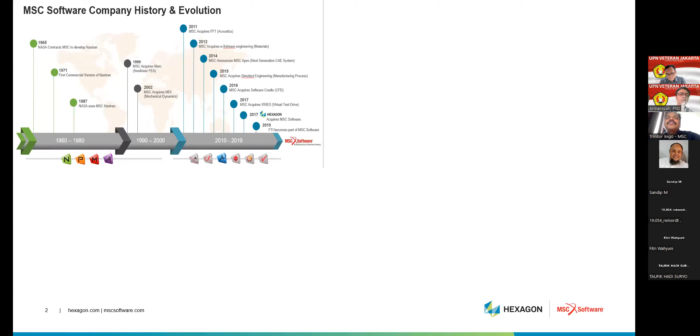So that's some brief history about MSC, how we started off. This is the same thing in terms of milestones that we have mentioned. The one which is talking today is basically Simufact. We acquired this company in 2015. Of course, Sandeep will give more overview of Simufact, especially on the welding side.

But these are all the kind of technology we got. Now, starting from Nastran - Nastran is a general purpose finite element structural software, where you can apply loads, boundary conditions, and see the stresses and deformation. And then Marc is a nonlinear solver, a highly nonlinear solver. And then Dytran is basically explicit dynamics, for your drop analysis, crash simulation, and those applications.

And Simufact is basically for metal forming, forging, welding, upsetting, or traditional manufacturing process simulation. Digimat is a tool used for multi-scale material modeling, like plastics, reinforced plastics, engineering plastics, mold flow, the fiber orientations in the plastics component. So that studies mainly the plastics and material side, polymer side, composites.

Then Actran is for acoustic and noise. For example, today noise has also become one of the important criteria. So any product you manufacture needs to get certified by authorities or government. Noise has become a pollution today, so every product has a certain level of noise they need to maintain in terms of decibels. For example, automotive engine noise, aircraft noise, or any kind of noise - we are able to simulate it virtually and modify or improve the noise aspect of the product. That's Actran.

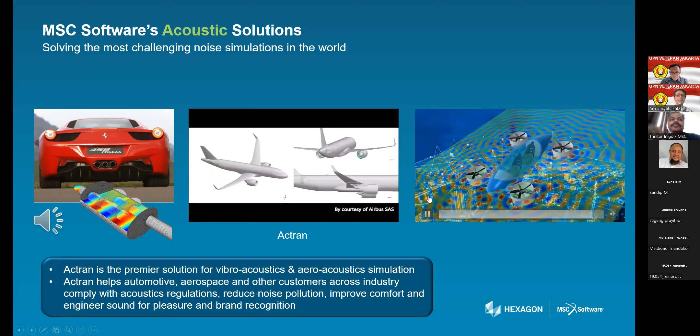This is again from MSC Adams plus VTD combined tool. And then you can see the gearbox, where you have the powertrain mechanism and gearbox and those things. So this also we have a solution for—Romax.

That's all, this is a little bit. So the virtual manufacturing, which I talked about—stamping basically, tool development, the blank and the fixtures. How to maximize material utilization, how to reduce scrap materials. The scrap or flash material can save companies a lot of time in terms of revenue. And cost optimizer—how best you can, on the tool designing side, help manufacturing companies build a tool in an optimal way.

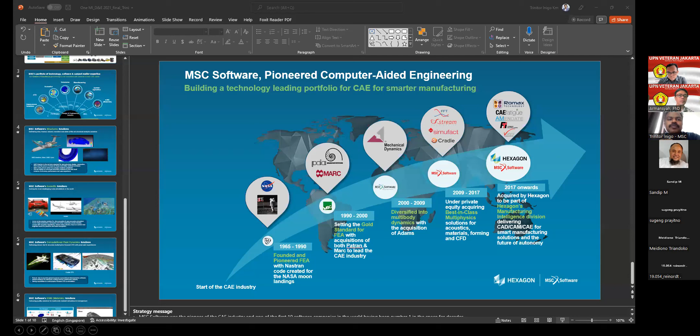Okay, so do you have any questions so far? Excuse me, any questions so far? So far, yeah, very interesting information.

So far, I can see MSC software, such as Adams and Cradle and so on, which can also be used for simulation and many things in engineering applications, such as robotics, automotive engineering, manufacturing, and so on.

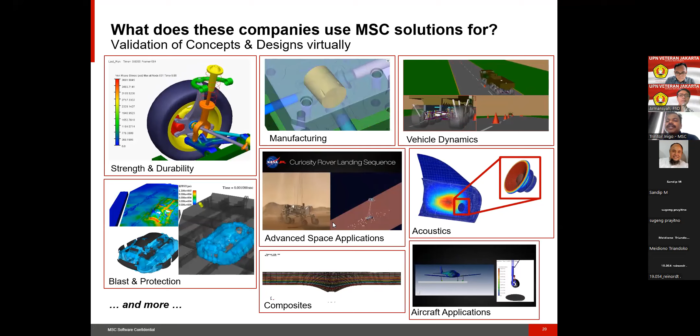So these are all the areas of application, MSC is there. And again, building the bridge between academic and manufacturing is another area. You can see there is a gap in applying math, science, and engineering - that is where the 98% gap is. That is why we collaborate more with industry-oriented R&D focus with colleges, universities, and academics, so that they get real-life applications with real-life tools, and people are able to get a job, driving the country's economy through this engagement.

Now I'll just keep this slide and go straight to these are a couple of universities. They adapted this in their syllabus and curriculum. And another one is some student competitions, like SAE, Baja, and those kinds of competitions, we offer licenses.

Now there is a course material we recently developed. This is one of the sample course contents. For example, you would have known this textbook, Design of Machinery, written by Norton. Many universities prefer this one during their third or fourth semester. So our couple of university professors in the US took this textbook and created some material, like tutorials, workshops, and exercises.

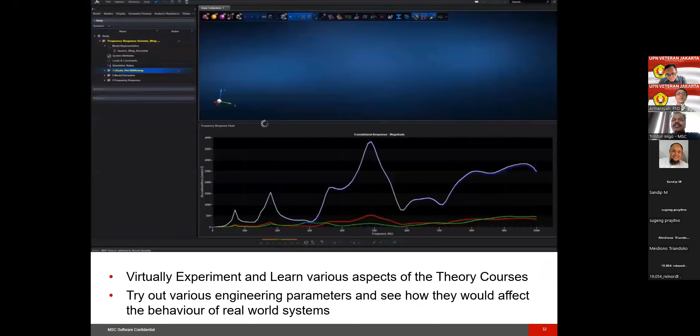In the morning they teach topics like cam and follower, and we created a supplementary toolkit. So in the afternoon in the laboratory, they go to the computer CAE lab and simulate. Morning they follow this cam and follower, or 4-bar mechanism, linkage mechanism. This can be applied in mechanical design, dynamics, robotics, and many machinery courses, like gear train, pulley problems. All these problems are referred to in the textbook, and we created a sample and compared the result - these are a couple, this is a 4-bar link mechanism.

So all these areas, when the professors or lecturers teach in semester 3 or 4 in mechanical engineering, we use SimuFact or respective softwares from MSC. They use it in the laboratories. These are a couple of examples like molding, glass molding, casting simulation, piezoelectric actuators, MEMS, and then fluid mechanics, for example buoyancy or fluid.

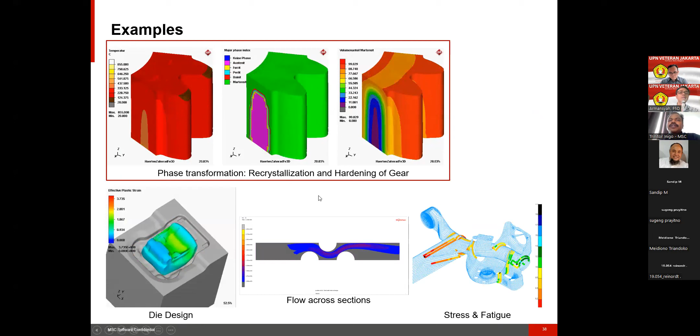This is another semester's things - we use Marc, SimuFact, and this. So this is a die design, one of the die design simulations we do. These are a couple of examples I can show. So like this, we can go on, for the fourth semester.

I'll just show this impact study, then this is wind energy - of course you may have this in a couple of your semesters. The cam follower mechanism, so how we are teaching in theory in the classroom. How we can do riveting, rolling, chain, assembly line. This is again robotics, a picking and placing robot, that trajectory. This is not only a mechanism, it has a mechatronic system because it uses pneumatics or motors to trigger the motion and things like that.

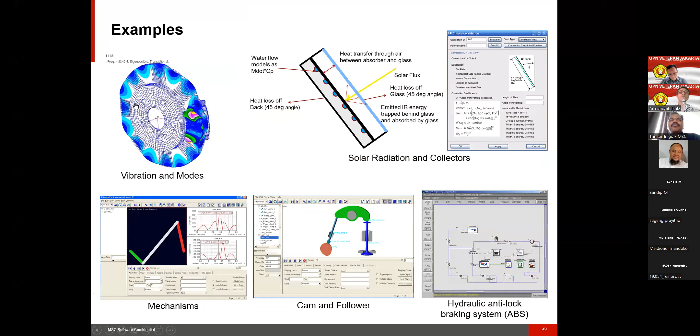So like this, we have every semester - this is 7th semester, and robotics, basically climbing robotics on a stair, shock waves, bending. These are all a couple of examples our students use in the engineering divisions. So that's all, this is one way how we can do it. This is 3D printing, the last one.

So now, this is one slide I wanted to focus on. There is a specific industry like automotive, aerospace in the market or country, and there are universities or academics. Industry will recruit students from universities, but at the same time industries will give a project or research to universities. So there is a two-way mutual interaction that should happen, and it is happening.

And where we belong is our MSC products at the bottom, where we supply to university, we collaborate with the industries, so that when these students exchange happens between university and industry, it will be a common platform or common technology or skills development. So that is where the academy supplies enough manpower to the country.

So with this, I will conclude my presentation. If you have any questions on this topic, please feel free to raise a question. I will hand over my session to Sandeep, and he will take you more detailed on welding and maybe a demo if he has enough time. He will show you a simple problem, how to set up or how to show the results. And then feel free to ask about any capabilities or features or anything you are particularly looking for. Let's discuss that.

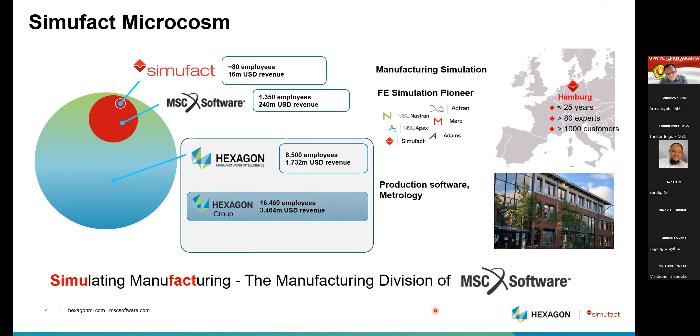And this is the history of the Simufact welding software. So all these companies, BMW, Mercedes, Porsche, Volkswagen, Audi, all these companies came together and gave an order to Simufact to develop a software for their particular welding application. Simufact developed that software and tested it in their shop floors. Since they invested in our software, it was exclusively used for them from year 2005 to year 2012. After year 2012, it was available for everybody.

And year on year, we have added a lot of capabilities like resistance spot welding. We have improved our solver and meshing capabilities. In the last version, we added this direct energy deposition method, which is a kind of additive manufacturing process, and this is a very hot topic area right now in academics as well. It includes processes like WAAM and layer by layer addition. The latest variation is Simufact welding 2021, which has a Python interface along with a lot of capabilities.

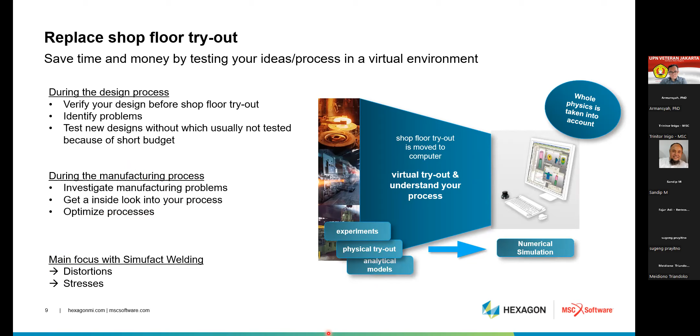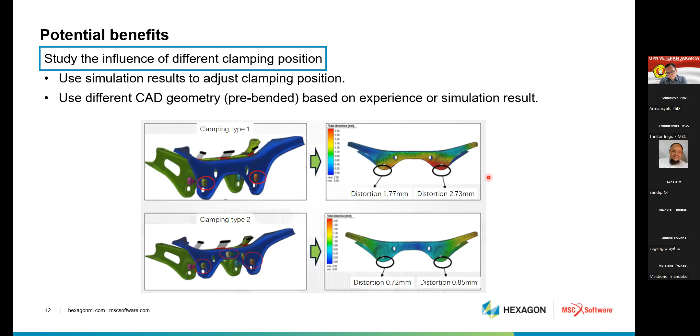It also helps you in designing the process, basically the design of experiment study, which academics needs. There are a lot of parameters that influence product quality or weld quality, like welding direction, welding sequence, pre-bowing or pre-bending, the number of welders or robots, and heat input, basically current and voltage.

So we can do this kind of design of experimental study. So as of now, we have seen the potential benefits we can get. Now we'll see some case studies.

Next example is inner door assembly welding, which includes laser welding. This is an Audi car door example. There are 3 robots working at the same time, and for each robot the welding sequence is shown with these lines.

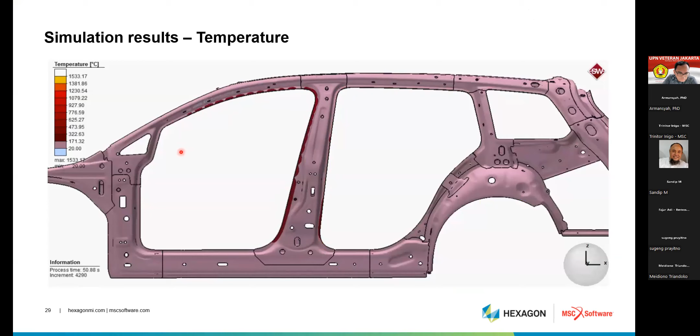Another example is the B pillar welding. In the animation you can see the welding operation happening and this is the temperature result, showing how the temperature is generated during welding. And this is the distortion, showing the area of high distortion, which is about 2 mm here, and this is the back side of it.

Another case study is from the Vollmann group, where we have included the forming history also, using the Simufact forming software. This is the final component. To form this component, there are 11 forming stages, like coining, cutting, stamping, and bending operation.

We take the results from one stage to the second, second to third, third to fourth, and so on, carrying the history through, and this is the final output. You can see it in this animation: this is the bending operation, this is my component, and this is my pressing tool.

Once it pushes and gets released, you can see there is a small spring back. We can accurately predict the spring back with the software. Then from the forming, we take the results to the welding operation, and you can see in this animation that the welding operation is happening. We have two cases.

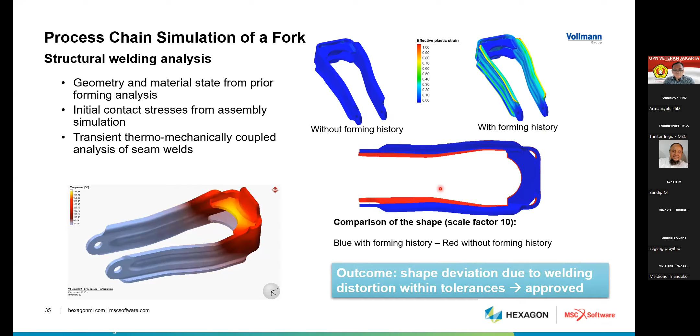Next example is resistance spot welding. This is the Jetta car example where we are doing the spot welding operation on the B pillar of the car. These are the fixtures, and you can see the temperature result during that, along with the distortion result and the stresses.

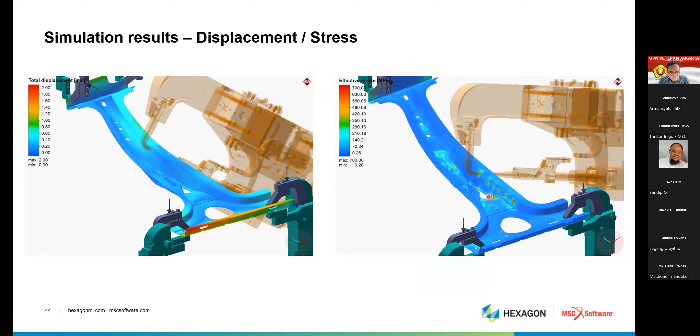You can see that high stresses are being generated over here. If the stresses are beyond the limit, the component will show either a crack or damage type of defect.

Next example is process optimization and fixture weight reduction. This is a two-wheeler bike assembly, and the components include the support and the wheel house, and this is the welding area. This is a typical shop floor setup: on one station the robot does the operation or manual welding, and on another the operator is loading the components.

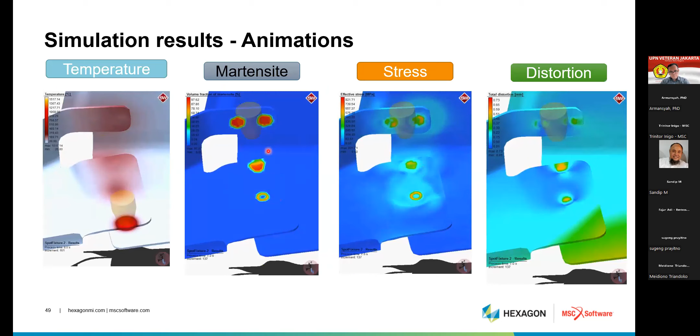This is how it looks on the fixture. The green and red parts are the components, and the rest are the clamps, with a total of 7 clamp towers, and the total weight is around 279 kgs. Then we see the different results: temperature, phase transformation (martensite formation) at the spots, stresses, and distortion.

After seeing that, we reduced 2 clamp towers from the fixture setting and adjusted the position of the clamps. The total weight was around 279 kgs, and after removing those clamp towers it came down to around 211 kgs.

Before removing those clamp towers, high distortion was happening in this zone, and after removing them we can see less distortion. So the fixture weight got reduced by 25% and the distortion by 70%.

So the next thing I wanted to showcase is this.

I wanted to showcase a case study on welding sequence optimization using artificial intelligence or machine learning. We have a tool called WSO, mainly for arc welding applications.

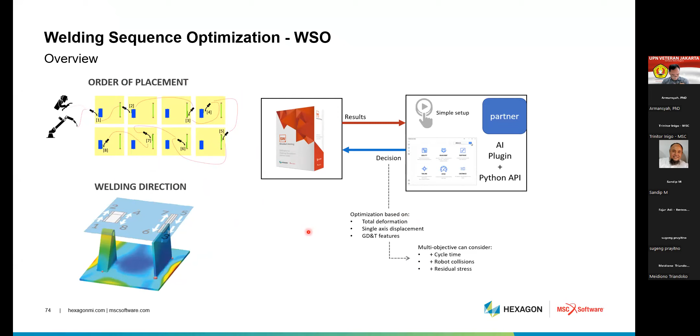If you have any welding sequence and want to optimize it, you don't know which welding sequence should be used to have minimum distortion or stresses. With the help of artificial intelligence or machine learning, we can predict what the welding sequence should be. This is the case study.

This is the cab floor, with some 117 weld bits and 12 components.

This is the WSO modeling. This was the original weld sequence, and you can see the welding happening over here.

With around 117 welds, our software predicted the optimized weld sequence, and it only takes 10 to 15 minutes. So within 10-15 minutes you get to know what the welding sequence should be to have minimum distortion or stresses.

With the original sequence, you can see the high distortion was there, beyond 7 mm. With the welding sequence optimizer, we are getting the distortion below 4 mm.

Again, this is from the bottom side. After unclamping, you can see that there is less distortion over here.

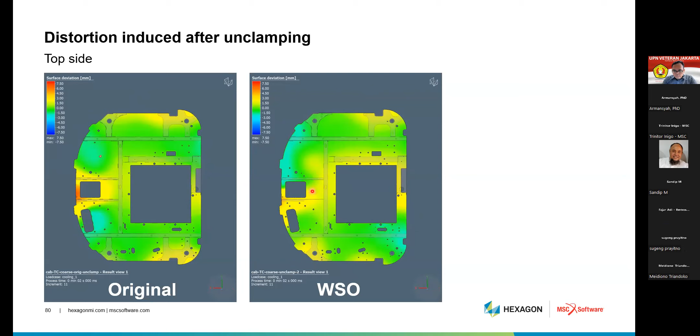Another case study is on the mounting bracket. This was very important because the components should be within tolerance to get the fitment. Earlier, with the original weld sequence, a lot of areas were out of the tolerance values.

When we predicted the weld sequence and did the welding, we can see that everything is in the green zone, meaning it is within the tolerance levels.

Okay, so up to now what you have seen is case studies for the manufacturing side. Now the case studies are for example if you want to take these manufacturing effects into your normal CAE process, or you want to do the structural analysis or the fatigue analysis. Fatigue analysis is nothing but you want to calculate the life of that component or the welds.

Okay, so the first example is the crash box. This is a typical location of the crash box, and these are the different shapes of the crash box. And after impact, this is how it looks like.

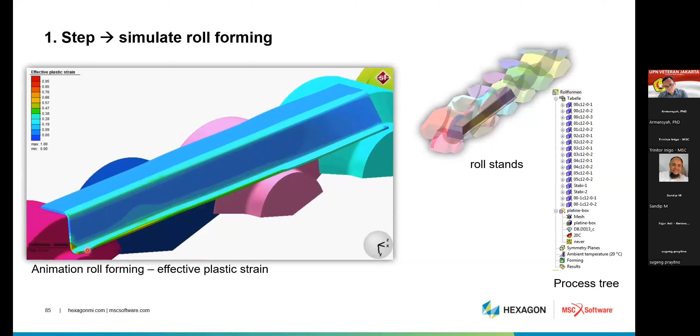So the first operation is the rolling operation. The flat sheet is passed through the rollers, and it creates a kind of U shape of the tube. Then we transfer it to the welding operation, and you can see this welding happening. So this is my base plate, these are the fixtures, and as an output we get the stresses and the distortion.

And this is the crash test we did. In one case we have considered all the forming and welding history, and in one case we have not considered any history. You can clearly see that the location of the distortion is totally different. And the graph showcases the absorbed energy by the crash box during that crash test - you can see there is a clear difference.

Now we'll see the case study for the fatigue analysis. This is an ongoing effort by the SAE FD&E committee to understand the weld-induced residual stresses and their effect on the fatigue life of the component. It will showcase after how many cycles this component will fail, or the damage or crack will happen under the operating conditions.

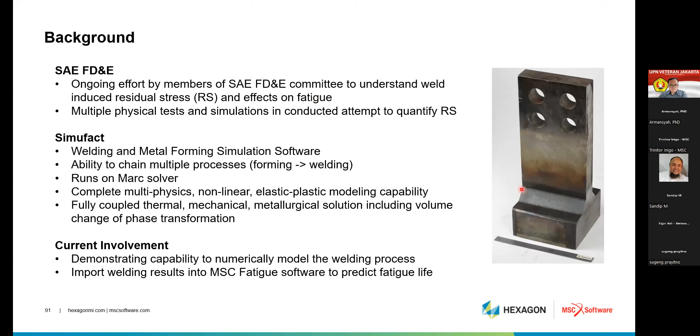So this is a standard making committee. There are 3 stages in this particular process. First is the welding simulation, second is the structural analysis, and the third is the fatigue life simulation. So we transfer the results from one stage to the second to the third. Now we'll see each process in detail one by one.

So this is the macro graph, it showcases that there are a total of six welds - 3 on each side, and the numbering shows the weld sequence: first weld here, second weld here, third, fourth, fifth, and sixth. Okay, and with this we are getting this kind of macrograph.

So for these 6 welds, we have these inputs like the voltage, current, wire speed, torch velocity, torch angle, and the cooling time between the 2 welds. With this setting we are getting this kind of weld pool, and when we compare it with the macrograph, it has come up perfectly.

And this is the test result, and we can see that the red area means the highest zone is there - the highest stress area is near the weld, and the component might fail at this particular zone. And this is the distortion, so it is bending towards the left hand side. These black arrows and lines you are seeing show the initial position of the component, and this colored one is the final output position. And this is a clip section showing that there are very high stresses here.

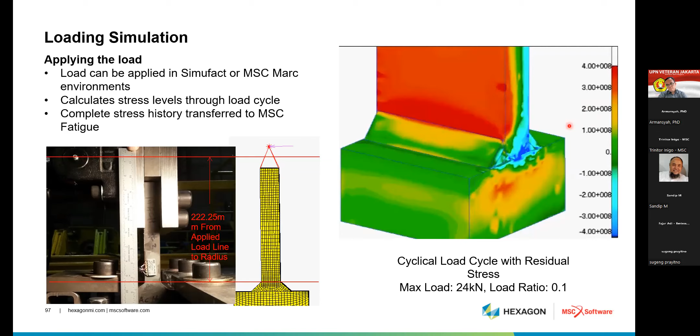And then we transfer the results to the fatigue software - we have MSC Fatigue or CAE Fatigue, in which we see that with a load of 24 kilonewton and R value of 0.1, we have calculated the simulated life as 47,700 cycles. So after these many cycles the component will fail, or the crack or damage will happen in this particular area.

This is the comparison with the shop floor setup. For 24 kilonewton and R value 0.1, we have the mean of the test data and max of the test data, and when we take the average of these two, it comes around 50,000, while the simulated life comes around 47,700 cycles. So it predicted very accurately in the software. This is my last slide - SIMUFACT has 3 softwares.

First one is the SIMUFACT Forming, in which we cover all the forming processes, right from cold forming, hot forging, sheet metal forming, mechanical joining, pressure welding, rolling, ring rolling, open forging, and heat treatment. These are the main modules, and under those main modules there are different sub-processes, like upsetting, bending, heating—all those sub-processes fall under those modules.

Also, we have a second software for additive manufacturing simulations, which covers powder bed fusion and metal binder jetting. We have just released this week the newest version of additive, where we can do the machining operation as well.

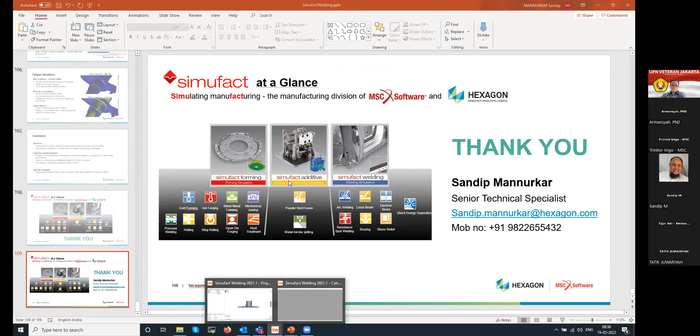Yeah, so maybe show how it simply works. Yes, yes, please. Okay, thank you.

So this is my screen—when I open the Simufact Welding software, it comes up like this. I'm going to show you what input parameters are required, and how easy it is to do the welding process. So I will create a new project.

Then it asks what type of process it is, whether arc welding, laser welding, brazing, or spot welding. You can choose accordingly based on your process. For demo purposes, I'm taking the arc welding operation. Here we can set up the ambient temperature—that's fine. Also we can define the gravity.

There are some parameters, like the components to be welded. The bearing is a part of the fixture—it's kind of a base plate. Then there are fixed geometries, fixed nodes, and other boundary conditions. Clamping, as the name suggests, is a clamp. Local joint is for tack welds. And robotic—whether it's robot welding or manual welding—we can specify those. So I will specify: one bearing, two clamps, and one robot, and say okay.

As soon as I say okay, it opens three GUIs. First is the process window, where we define our process. Second is the object catalog window, where we input the parameters required for the process. And third is the GUI. For any welding simulation, we need only five parameters. First one is the geometries—you can import the CAD geometries, or you can import the mesh.

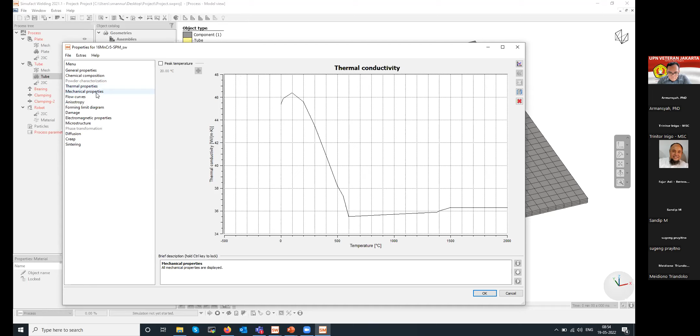Similarly, mechanical properties like Young's modulus and thermal expansion coefficients change with respect to temperature. This graph shows thermal conductivity versus temperature. We also have the flow curves, which are stress versus strain graphs, shown with respect to different temperatures. These properties are very important and all are temperature dependent, so we get very accurate results.

The third parameter is the temperature - basically the initial temperature of the components, which we need to define. We can also define the heat transfer coefficients.

The 4th parameter is the trajectory, where we define our weld line. I need to select the starting point of the weld and the end point of the weld, and it connects all the dots in between. So this is my starting point and this is my end point - it automatically selects the nodes in between.

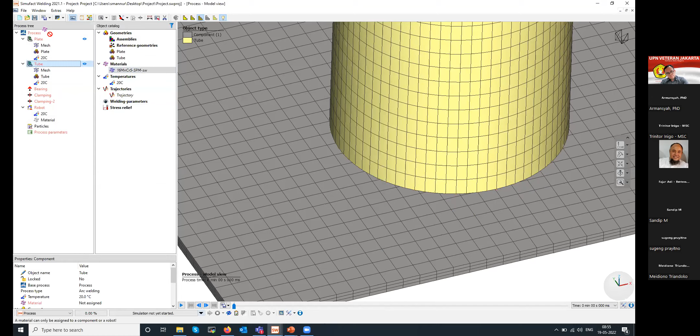I will assign this material to everyone by dragging it to the process, and it automatically assigns it. You can define different materials for each component. Then I can define the trajectories to the robot - later on we'll see what those arrows mean.

Coming to the last part of the object catalog window, the heat source - I right click and select heat source. Here we define the welding parameters, starting with the torch velocity. I can select the unit as per my requirement, and I give it some random values for the torch velocity.

This velocity is nothing but the torch velocity of the welding torch. We have different types of heat source heat mode: indirect power and direct power. In the indirect power, we mention the values of current and voltage, and in the direct power, we mention the wattage value.

Mostly direct power is used for the laser welding application. For demo purposes, I'm choosing this indirect power. Let's say current as 120, voltage as 30 volts. Based on these parameters, it automatically calculates the heat energy that we are going to put into the component.

With the efficiency, we can calculate the total net energy we are putting in. Then there is a heat source model, based on the Goldak double ellipsoid model. This showcases the heat volume, and there are different types for conventional and laser welding applications. So we need to define the heat volume based on the Goldak double ellipsoid model. What we need to do is click on this I button over here.

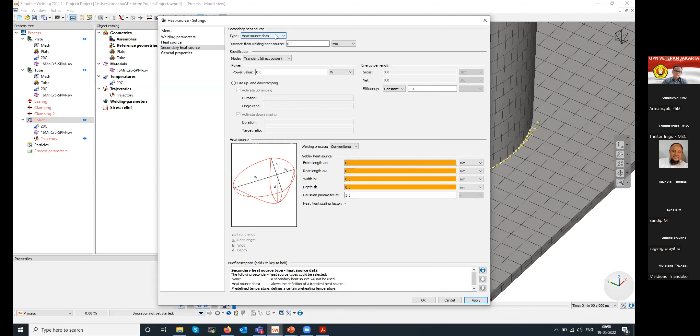So I can put those values, and I can put the secondary heat source information. We also have a facility to provide the secondary heat source. For example, if you have two types of welding - one is laser welding, one is arc welding - and you're doing it concurrently or as tandem welding, we can define the secondary heat source as well. This is mostly used in academics.

So I calculate the heat source, and then I can apply that heat source to the trajectory. So I have completed my parameters. Now I will come to the process tree window.

First of all, I will create some fixture for this. I can just directly go to the bearing. I will create one simple base plate for this - I will say create a cuboid. I need to select the location, click it, drag it, hold it, and release the button. So I can create this kind of base plate, and I can change the sizes of it. So I created one base plate, and on top of this, this wheel is resting.

Now I will create the 2 clamps for this component. I will again use a similar process - I will generate some clamp on top of the location over here, like this, and also one more clamp.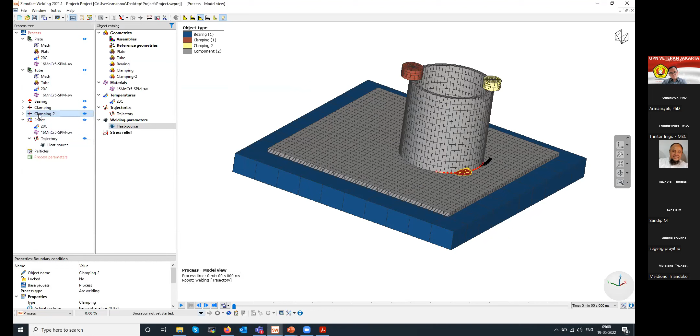In the clamp properties, we can feed the activation time information - for example, after some time you want to remove those clamps, we can specify that time. Let's say, for example, after 10 seconds, I want to remove those. I can feed that information, and also put the information of the clamp force - let's say 0.3 kilonewton force I'm applying on this clamp. With this calculator button, it will automatically select the force direction, and you can see for this clamp what the clamping force direction is.

Similarly for the robot, I'm mentioning 10 seconds - so after 10 seconds, I'm going to remove those clamps, with 0.3 kilonewton force. So from the geometry point of view, I have finished this one.

Now I will come to the robot settings. You can see that in the welding sequence, it automatically calculates the total length of that weld, and how much time is required for that particular weld, shown over here. For example, this is my first weld - if I want to start the second weld from, let's say, here to here, somewhere like this, we can give that information.

So there is a weld sequence here. When I finish my first weld, the weld torch has to move from the end point of this weld to the next point, the starting point of weld 2. So there is travel time, and no heat energy is being added to the components during that time. We can specify that time too, let's say 2 seconds, and feed that information here.

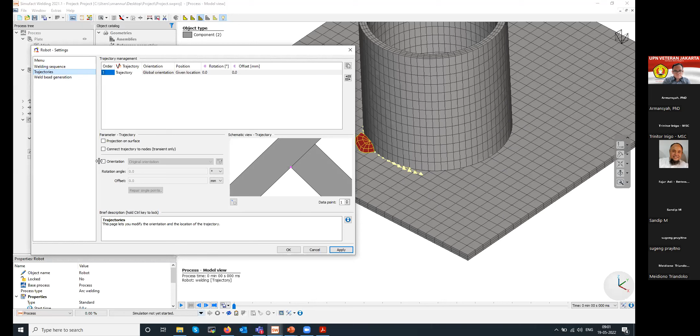Then in the trajectories, what we define is the torch angle, the orientation. As soon as I click on orientation, you can see this schematic view where the pink arrow showcases the torch angle. Also in the GUI, you can see these arrows, which are nothing but the torch angle.

I can also change that torch angle, the rotation angle. Let's say I want to move it by 20 degrees, so I can change the torch angle by 20 degrees. Like this, I can define the torch angle. Minus 20 will move it in the above direction, so it can go plus or minus.

The next parameter is the weld bead generation, where we are creating the filler. Let's say generate weld filler. By default, we have two types: triangle and quadrangle type of filler we can create.

For the triangle, we need to feed certain information. When I hover my mouse over those parameters, it will show what is meant by A, B, Z1, and Z2 in the schematic view here. So what I need to do is just put in the information about Z1 and Z2, and it will automatically calculate the A value.

The rest you can just keep as it is and say preview. So it has created that geometry by itself and meshed it itself. I can select different types of mesh quality, coarse, medium, and fine, and say preview to see the change in mesh quality.

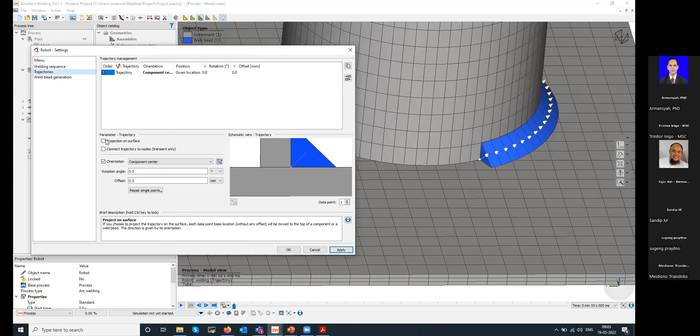Again I come to the trajectory, open projection on the surface, and say okay. I can cross check whether I have defined it correctly. Please click on this animation, so you can see that my heat source is moving. This is how it looks like.

Then I come to the last thing, the process parameter, where I can define the types. We can run two types of simulation: thermal simulation and thermomechanical solution. In the thermal solution, we just see temperature related results, and in the thermomechanical, we see results like temperature plus structural, basically distortion and stresses.

The thermal solution is needed only when you are going to calibrate your heat source. Calibrating heat source means checking whether the given heat source is correct or not, whether it is creating a proper weld pool. Once we verify that, we can run the thermomechanical solution to find out distortion and stresses.

Also, we have three different precision modes: normal mode, precision mode, and fast mode. The fast mode gives results within very short time, but accuracy will be less compared to normal and precision mode, so normally we use normal mode. Then parallelization is provided to run the simulation faster.

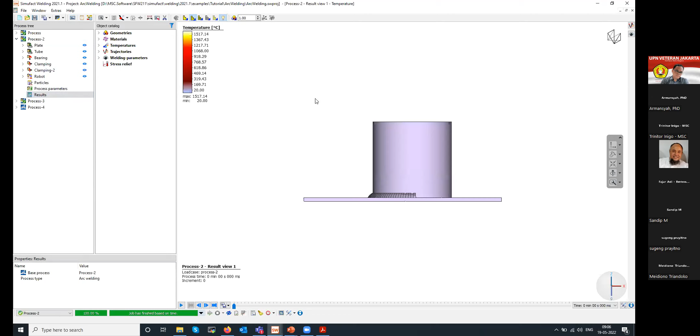What different types of results can we see? Okay, so this is my result window, and these are the different types of results I can see.

In the standard results, we can see temperature, peak temperature, total displacement, stresses. I can see all the temperature related results, heat flux, temperature gradient, all types of displacement in every direction, all types of strains, all types of stresses - flow stress, equivalent stress, normal stress. In phase transformation, I can see the major phase index, volume, the percentage of different phases - pearlite, bainite, ferrite, hardness, full stress, cooling rates, and the mass portion of the different components.

Mostly people need this temperature, peak temperature, displacement, and equivalent stress result.

So when I switch on my animation, you can see that welding operation is happening. I will show the boundary condition also, so after some time this clamp also gets removed. I can see the welding operation happening, how is the effect in the heat affected zone - you can see that after some time this got released.

I can see the peak temperature results, and these are the different temperature zones I can see during that welding operation, how it occurred. This is very important in academics to know the different temperature zones over here. I can see the equivalent stresses.

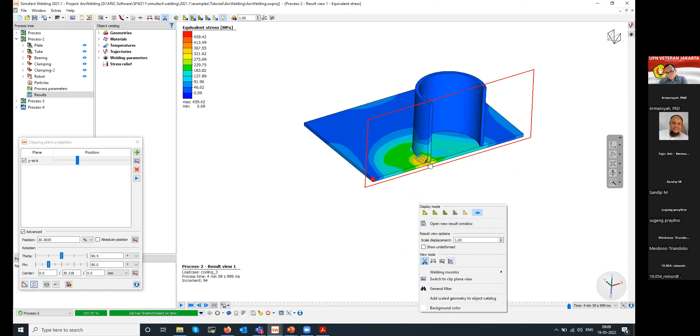Also, with the query button, I can see the different results at any point, at any cross section. I can see those results. Also very important results.

Suppose, for example, you might remember that 300 seconds time we have defined, and I want to see how it is affecting at this particular node, for example, during that 300 seconds time. So I can see that graph, basically the time history plot. At this particular node, it is tracking those things, so you can see that for the 300 second time, how the temperature is changing at that particular node. I can see it using this graph.

I can choose as many points as I want and see the results. Apart from temperature, I can see the stresses, the displacement, and you can see all those results in graphic format. So next important result is the weld pool.

On the right hand side, you can see one red plane over here - that is my cutting plane, and that shows the cut section on the left hand side. When I switch on the animation, this cutting plane is moving, and on the left hand side I can see one red zone over here. This red zone is nothing but the molten area.

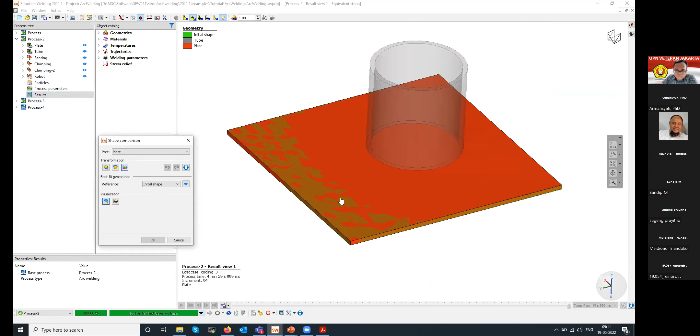Another important result is we can do the shape comparison, so we can know how much it has deviated from the original position. Also, if you have a 3D scanner, we can scan the final components and bring it over here and compare it. So you can see the surface deviation happening, how the surface deviation is happening from the original position.

You can see that there is one small transparent part - that is my original position. And after the welding operation, this is how it has deviated from the original position, so we can see that clearly over here. This is the importance of the shape comparison.

The UNV export is needed when you want to do structural analysis or fatigue analysis. From here you can select the geometries you want to export, the increment at what you want to export the results, what type of result you want to export, and then it will create one UNV file which can be used in further analysis.

We have huge help documents which are very easy to use. So when I open the demos and examples, we have tutorials with a step-by-step procedure on how to do the particular welding simulation. It will show that step-by-step procedure, training material is there for each type of process.

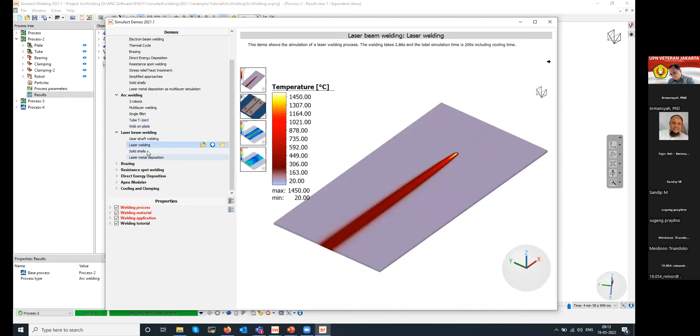We have different examples for each process - for example robots, multi-layer welding, circular plate, web on the plate. For laser welding, we have gear shaft welding, solid shell, laser metal deposition, the brazing operation, the spot welding. Then we have, for example, the DED operation.

Okay, so like this, we have huge help documents and very easy to use software. So this is from my side. Please let me know if you have any questions.

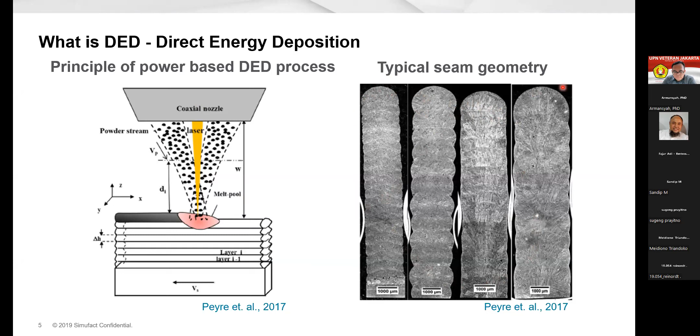This is all the micrographs, and these are the objectives we can have - what is needed. From the academics or institutes: fast prediction of distortion, identification of local heating areas, hotspots, including a hybrid approach for repairing parts.

So this is the current process. Instead of doing the setup on the shop floor, we provide that G code to our software and do the virtual testing. You can see how it is layer by layer adding into the component, and then again we check it.

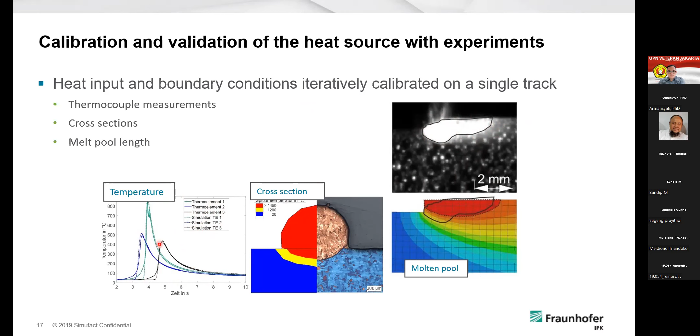These thermo elements are nothing but thermocouples to measure the temperature at different locations, and that measured value we can compare over here. You can see a very good correlation between simulation and the experimental one.

You can see over here this example, the small plate where the deposition is happening, and these are the different points where the temperatures will get calculated. There are different stages in the total process, like the DED operation and then the cooling operation, so at different stages we can see the comparison, and we have the correct geometries.

Also defects like delamination, these things we can predict using the high stress or the plastic strain. And this is the temperature versus simulation comparison.

You can see the different peaks. This showcases that during the welding operation the temperature rises a lot, and then in the cooling the temperature comes down. Again something like this happens.

So this is the layer wise information: first layer, second layer, third layer, fourth layer, fifth layer, like this, these things are there.

This is an example of the 30 layer metal deposition, and this is the comparison of simulation versus experimental. This is a distortion comparison for that earlier study.

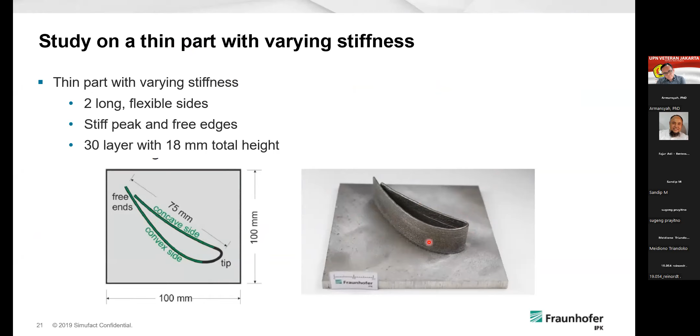We can study this on a thin part with varying stiffness. This is a convex side and concave side, so it has varying stiffness over here, and this is how it looks on the actual one.

This result is done by the Fraunhofer Institute. Also you can see the stress deformation happening after the wire cutting operation.

This is how it looks with the scan geometry. This is the simulation method: we provide the CAD format, as was shown in the demo, and we get the distortion values.

And this is how the actual one looks. We printed the part, then with the help of a 3D scanner we scan those components and get the CAD geometry out of it, and we are comparing the simulation versus that shop floor result.

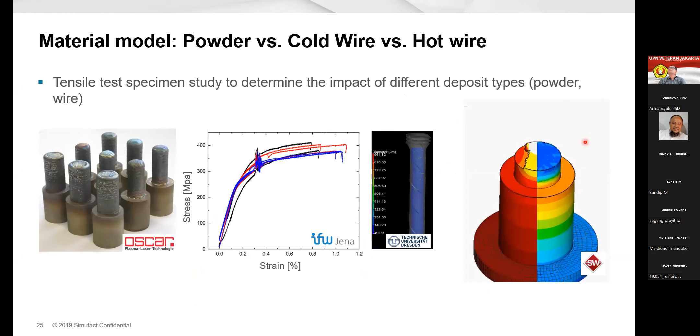We can do that same comparison. Also, different material types we can use: powder, cold wire, hot wire. Different things we can use.

So currently we have implemented a lot in this one. Currently we import the G code, or we can manually define it.

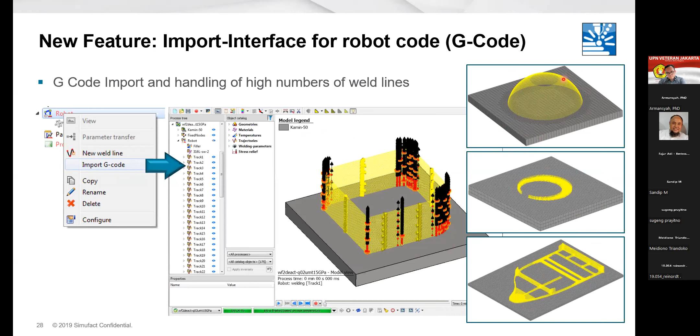These yellows you see are nothing but the torch, basically the trajectories, the tool path basically. This is how it looks on the software.

We use the direct energy deposition. We import the G code which has the information about the weld lines or the DED lines. Then we are creating one base plate over here, then we are meshing it, the component, that base plate, and then we are going to add the deposition material.

Okay, so we are putting that information over here. It will cover the area of the tool path, we need to confirm that. Okay, once we clear that, it is covering that part. So then we are assigning the heat source, creating the boundary conditions, and now we are going to start the simulation.

Okay, now you can see that this much thickness will be the layer deposition. Now we are running the simulation, start analysis. Now you can see the results. So like this, it is layer by layer addition, you can see clearly. So you can see this temperature results in the animation over this one.

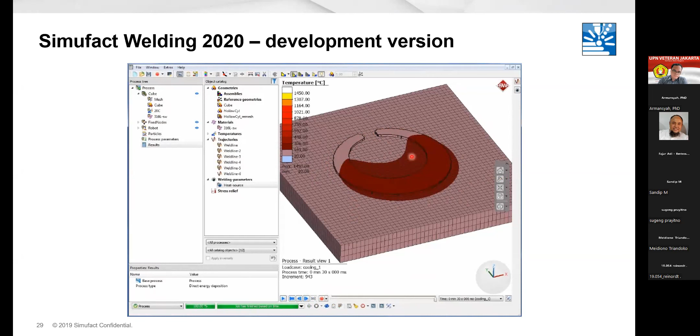And these are different G codes. We are going to implement the different sections. And this is for the circular parts. You can see this is the actual one, the substrate here. And this animation showcases, on the circular tube also we can do this. Also we can see for that example how it is changing the shape, and it is depositing layer by layer.

So from small parts till the big parts, we can do the simulation. So this is the WAAM process, a kind of wire arc additive manufacturing process. This is the weld pass over here, and this is how the deposited geometry looks like, and this is how it actually looks like.

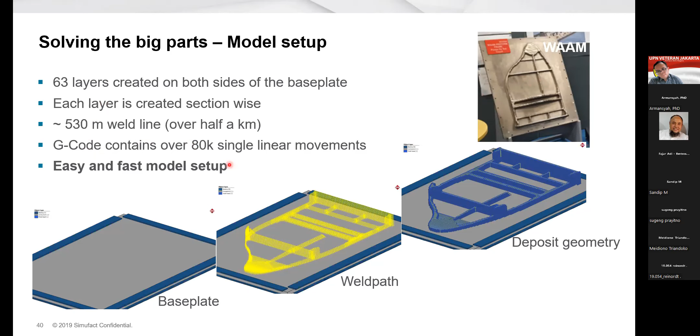Okay, over here. So there are some 63 layers and there are 530 meters of weld line. So over half a kilometer we have. And so this is the...

Simulation time required, but recently we have added one more approach in our software. This is a little old one, but we have added one more capability. Earlier it required 5 hours. Now it will finish within half an hour. So just 30 minutes, we can finish this kind of simulation with good accuracy and everything. And you can see this is how metal deposition happens.

Okay, so this is the last slide, and that's it for the DED side. Okay, so this is additive manufacturing, but comes under welding operation, and for academics it is now getting very famous.

So that's it from my side today. I believe I still have some half an hour, right? Yes, sure, 30 minutes. So we can take a break of 30 minutes, and then my colleague will start on the additive manufacturing process.

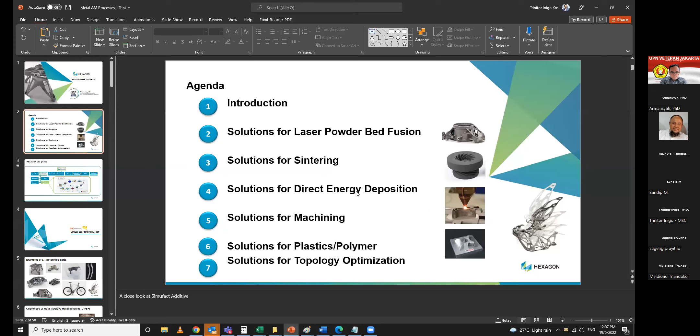Yes, I'll share my screen. Are you able to see my screen now? Yes, now it's okay. So this is basically an AM slide. Of course, I understand Sandip has done, he covered already the DED perspective. So this agenda has powder, laser powder bed fusion and sintering.

And just one minute, I will just follow. Okay, ask my colleagues to join. One minute.

So sintering is basically binder jetting, and DED is another welding technology, but we use it in additive, and then machining, and then plastics, polymer, and topology optimization. Now, can I know what kind of technology you are looking keen on? Is it powder bed fusion or binder jetting or DED welding or machining or plastics, polymer? What kind of printer you have right now?

Right now we have plastic and polymer. So you have a Stratasys or something, is it? Yeah. In the future, we plan to have also for powder and metal.

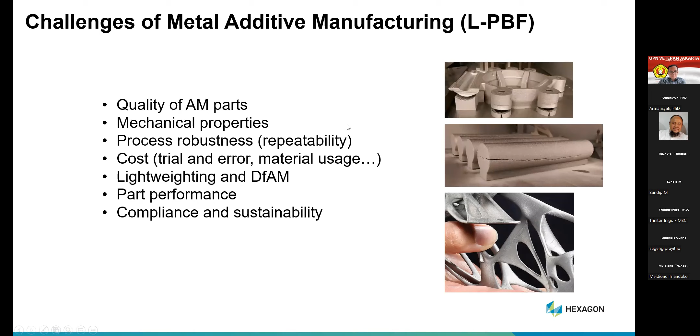Now the solution we have is Simufact. So we can bring the CAD file and print it in a computer, so that you don't waste your time, cost and money in actual printing or trial and error method. And the support structure generation, and for example the orientation, whether you want to print vertical or horizontal, all those things you can do virtually here. And then you can reduce the time as well as the cost and money, everything. And then finally, you can go for actual printing.

And we have collaboration with Materialise, which is a Magics software, or we can have Additive CAD. This tool will support support structure generation. Of course, we have our own support structure generation, Simufact, also.

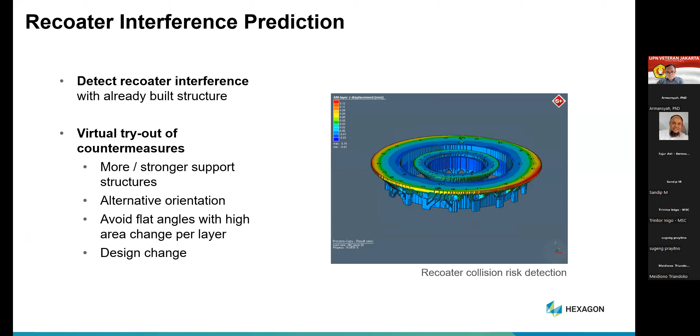Okay, so this is to show you about the recoater collision risk - you see the red color. Normally in the printer, you may print like 5, 8, or 10 hours, or maybe 2 days, but after some 15 hours there will be a crash or failure, and then you need to change the parameter and reprint again. That is a waste of time, right? So this kind of situation we are able to find in the software itself.

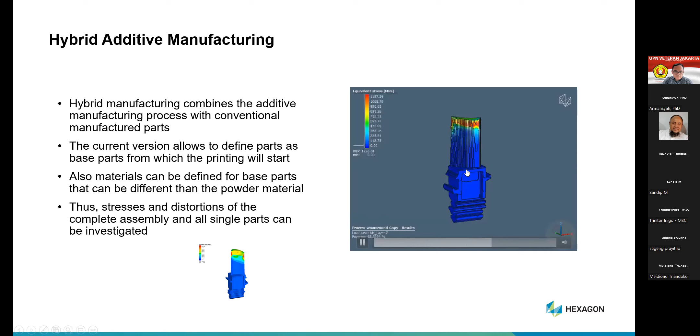And then hybrid manufacturing, when you print a component on top of it from the base plate. This is especially useful for a turbine blade kind of application. So we have hybrid additive manufacturing also.

And then we have an optimization tool - it's topology optimization. You just define the fixing area, the loading area, and the manufacturer constraint, and it will automatically optimize. And the same thing you can print in 3D printing.

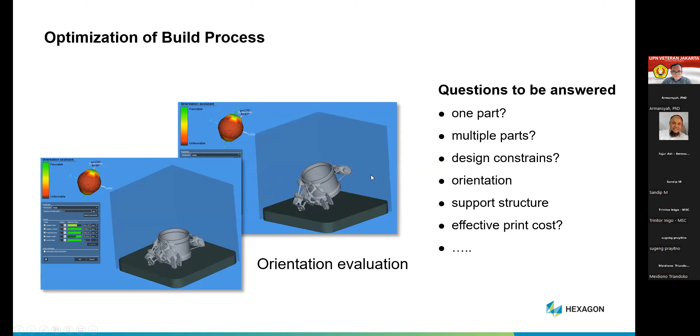And this is a couple of examples. This is one variant of the same concept. This is another, and this is again another, with different orientation. For example, is it one part? This is the base plate, and this is the build space. Is it one part or multiple parts, and different orientation? So these are all the areas, the parameters you can play around with, and you can improve your simulation in order to reduce the cracks or reduce the deformations.

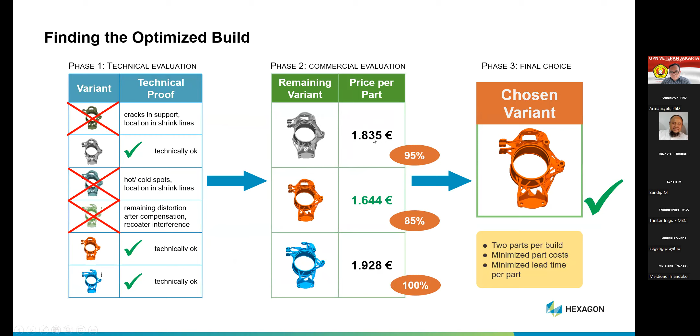And this is just to check the cost-based commercial evaluation - how much estimation calculation per part, how much will be the cost.

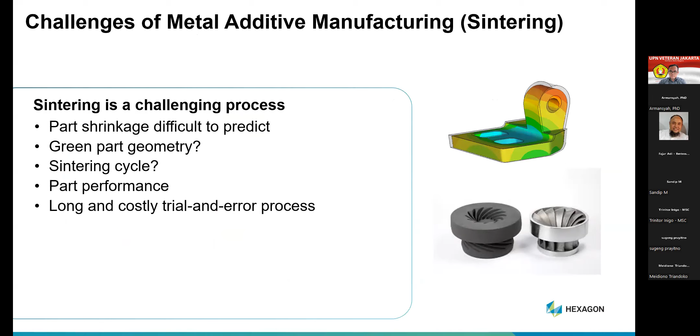Then sintering, it's again binder jetting basically, or people call it a HIP process. The part shrinkage is very difficult to predict, again depending on the green part geometry and sintering cycle.

So these are all the challenges we face when we do the sintering process or binder jetting. This is one example to show you a bevel gear which we have done using printed here, and this is a results overview of grain size in micron level predictions, and also the density, because in sintering the density is one of the important challenges. So the density prediction also we are able to capture using the software output.

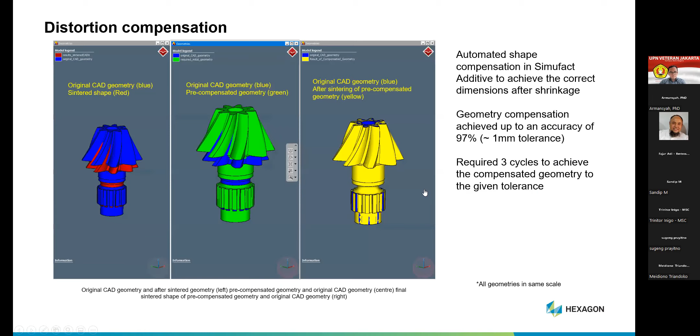And this is again a compensated geometry. You can see here the geometry compensation we achieved, less than 1 millimeter tolerance level, and we did this with only 3 cycles to achieve this level.

And this is DED, I think Sandip already covered, so I will just skip this DED portion. It's basically a welding one. This is the workflow we are trying to build for G-code.

This is our tools, then it will create an APT or the G-code, so then it will come to NCSIMUL, that's another CNC simulation software. We will import the trajectories and then export 3D volumes. The 3D volumes will come to Simufact Additive, where we compute the distortion and the build process, the 3D print process. Again, that will come back to import the distortion or stock simulation verification in the NCSIMUL CAM software, and this again will come back to the CAM software. It's an iteration, so this is how we improve the machining simulation workflow.

And I would say this is one of our first modules, or first technology in the market from any software company that offers additive manufacturing, considering this is a machining module as well.

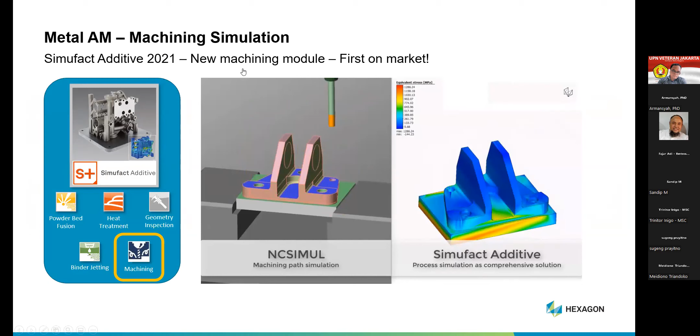So this will deal with this process. The powder bed fusion, the sintering, binder jetting, DED, that is from Simufact, that's our metal group, and this Digimat is from our plastics, polymers, and composite team who built this technology for SLS, FFF, and FDM.

Topology optimization is another hot topic when it comes to additive, because in additive you are able to build or manufacture whatever the traditional ways are not possible to do. So anything which is very tough to do with our regular mold and die or any kind of traditional methods, we are able to do that.

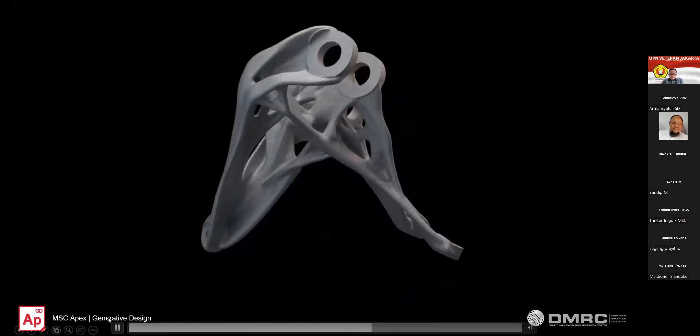This is just to show you an example of what we call Apex generative design. So we have the generative design tools to make designs very feasible for AM manufacturing.

So it's lightweighting. Lightweighting is another important key point: efficiency, time to market, and cost. In many of our projects we are able to reduce 50% cost, weight reduction 63%. Then reducing fixturing, all those things, we were able to come up with, considering all these facts we are coming up with the best designs for additive.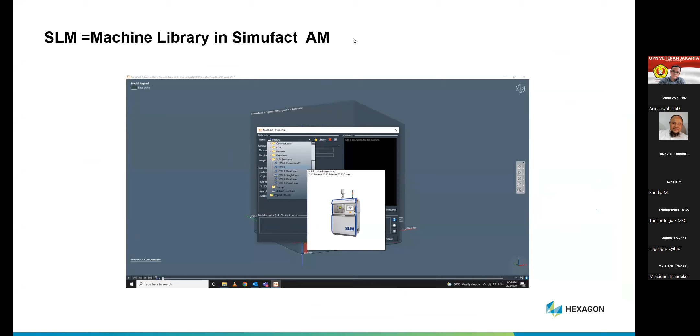So this is a CAD to CAD workflow, again Apex generative design, and this is just to show you a screen capture. Whatever metal printer you buy, it can be - this is for SLM, but you can see here SLM, EOS, Concept Laser, Renishaw. So all this material database, the library is here inside, so we can just pull and choose whatever machine you buy, and we can straight away click, and all the data are there, and you can run it.

So this is just an overview of our additive solution. And Santosh, are you there online?

Yeah Santosh, can you just show them one simple example of a tool, the Simufact powder bed fusion? Okay, so maybe a couple of published case studies, yeah maybe our one case study or something you can show. Yeah, okay, done, I'll do that. Any questions, by the way, Professor?

No, so far fine. Thank you, okay. Any question, Dr. Damora? Yes Santosh, we can see the screen. Okay, I hope you can see.

So to give a quick introduction, when I say additive manufacturing, we are not only focusing on powder bed fusion. As Pini already explained, we have solutions for powder bed fusion with SLM technology, metal binder jetting, DED. Then when it comes to polymer and plastic, we have Digimat software where we can simulate FFF, FDM, and SLS process.

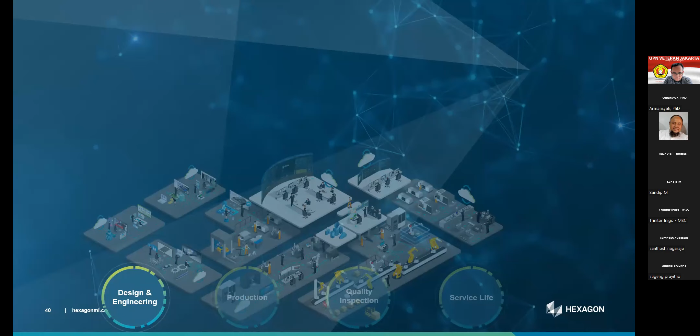This is to show how industries adapted. If you ask me what industries we support, you can name any major OEM - we are working with them. Service bureaus who do the printing for the OEMs - we are working with them. Then educational institutes - we are supporting them. In fact, we have a couple of training courses where we train students on design for additive manufacturing, then quality inspection.

This is the end-to-end workflow or platform we provide for any industry or institute who wants to adopt this additive manufacturing technology. We can start from material to quality, where we use a couple of our tools to select the best material for the given application. Then start with design, manufacturing, inspection, then service life.

So we can really estimate the service life - I can call it product durability, fatigue life. Fatigue life estimation can be done for the given component.

Apart from 3D printing, we do a lot of post-printing operations like heat treatment, hipping operation to improve the density of a 3D printed component, then CT scanning. We can do CT scanning if you're into reverse engineering, bringing scan data into a CAD platform. There are tools that can directly convert the scan data into a 3D model without much manual intervention, saving a lot of time.

Then if we are more into DOE analysis and statistics, we have tools where we can help you reduce the number of trial and error - whether on the shop floor or in CAE simulation. We can use our AI to reduce or optimize the number of runs. So this is an overall picture of how we are working with different industry types with our AM solution.

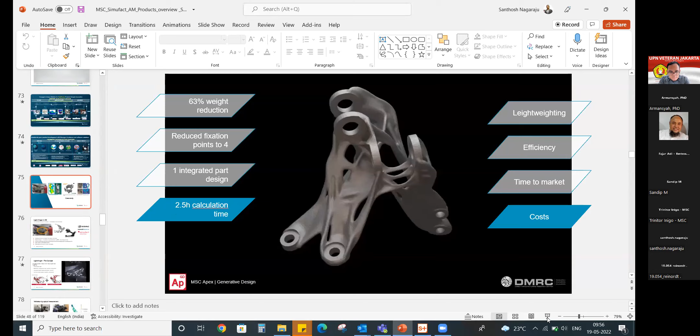So these are a couple of case studies. One, we worked with one of the car makers where we wanted to do lightweighting. This is one of the major requirements when it comes to automotive, so they wanted to do the lightweighting.

This one is with medical healthcare. Recently we published a case study replacing a hip socket with a 3D printed implant, which is quite booming. We see a lot of 3D printed implants in healthcare, where we worked starting from designing an implant, printing it, then certification, then putting it into the patient.

Then there's lightweighting and optimization, and these are case studies published by Safran and Green Team. There are a lot of case studies on using this in automotive and aerospace. This one was from Safran - they used their own material, and with that they were able to predict the failure.

I'll quickly run through this example - I'll show the video comparing conventional design with a 3D printed one. This is a 316L material which was previously forged, had some sheet metal components, and was joined with rivets - overall there were 38 components. We reduced it to 6 by breaking it down into upper bracket and lower bracket, and we were able to print that with the given dimensional accuracy.

In fact, we had a couple of challenges, like how do we bring down the distortion below 0.75mm - that was a challenge. So we generated different support structures. The second challenge was how do we address scalability, like printing multiple components. We did the nesting, and we were able to print 6 parts on the same base plate, which helped us address the scalability issue.

This one is with the student race car. We wanted to have a very light wheel - the lighter the wheel, the better the cornering efficiency. So we wanted to lightweight it considering the manufacturability.

If you ask me what is the accuracy of simulation, here's an example. When it comes to additive manufacturing, the greater advantage is we can capture each and every parameter in the process, so the simulation results can go above 95% accurate.

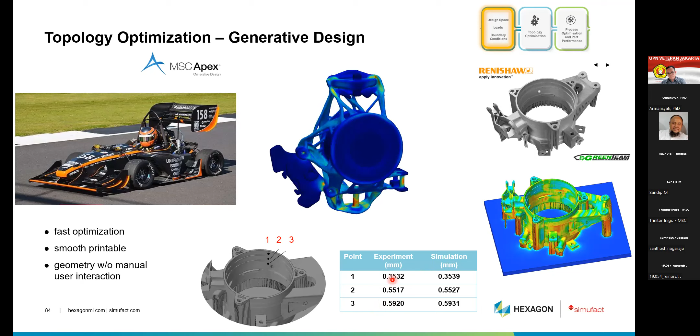This is an example where we start with technical evaluation as well as commercial evaluation. In technical evaluation, we selected the best design - design for manufacturing and material. In commercial evaluation, we did the cost estimation to choose which is the more feasible or economical design, one we can print at lower cost. Then we chose the one qualified from both technical and commercial points of view.

These are case studies published by our customers. This one is from Safran - they made SimuFact part of the process flow before going for any printing. They simulate and understand what challenges and modifications need to be done, and only then do they go for actual printing, so they save a lot of powder, money, and time spent on machines and resources.

This one is with BAE Systems - they had an issue with buckling, so we helped them design a particular support which helped print a component without the buckling effect. This one is with Bosch.

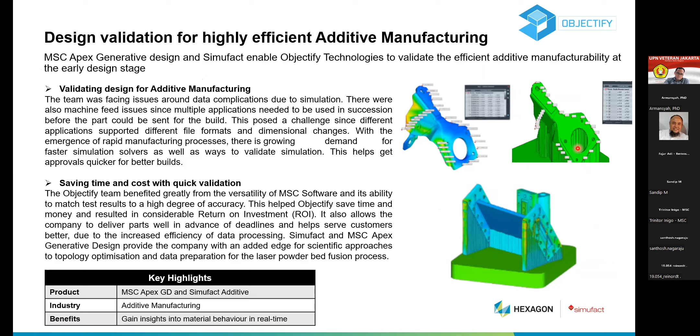Now these are published case studies by our service bureaus, who used our Apex generative design for optimization and SimuFact Additive for printing. This one is with the tire industry.

We see rapid growth in adoption of additive manufacturing in the tire industry - not to print the tire itself, but to print the mold for a new tire design for validation. So instead of getting a complete mold conventionally manufactured, they print a quarter of the mold for testing and verification of their new tire design.

This has been quite successful - we printed a component in the same pattern as the new tire design and were able to validate it, saving a lot of logistics time and cost. Otherwise any new design takes more than 6 to 9 months, but here we were able to do it in 2.5 months.

These are other examples of internal cooling channels - how we can optimize internal cooling channels plus 3D print them. This is more of a medical application, showing how implants can be 3D printed. The challenge here is, when it comes to medical, we use a different grade that's quite expensive, so we have to print it right the first time with the best, optimized design.

So these are the other examples which we have actually printed and implemented. Yeah, with this I end my presentation.

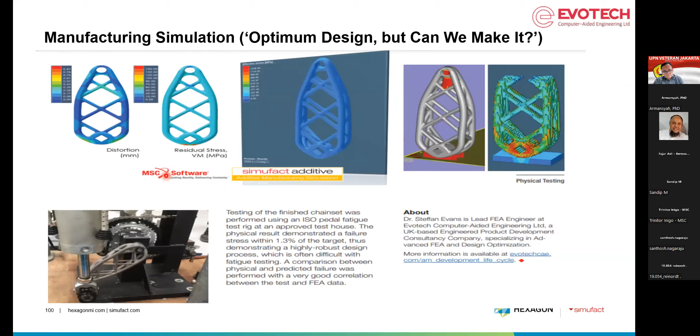At the same time, we have continuous support when it comes to training the student, because additive manufacturing is new and not as familiar as conventional methods.

Okay, so with this, I end my presentation. Any questions?

Yeah, if there is no question, I think I'll turn it over to you. Thank you, Santosh. So do we have some extra time? Yes, we still have time. Santosh, please, have you opened the software? Yeah, I have, so you've shown it already. It's open on my laptop, so I can share it if you want, just to see the interface. You can show them a demo. Okay, maybe 10 more minutes.

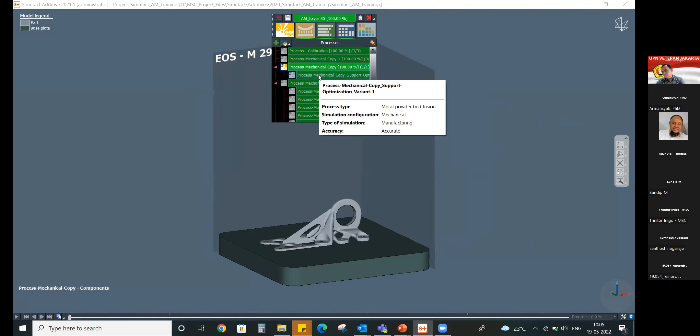Okay, so this is the additive GUI. We always start with calibration, then run the actual part, then we go for optimization, where the software can tell you which is the best support structure. Then we go for distortion compensation. I'll quickly show you the advantage of distortion compensation.

So when you have a design and you would like to print that part within a particular set of distortion values, you can give the maximum distortion or allowable limit to the software. Then it will run multiple simulations and predict, with different sets of parameters, what is the optimized or compensated design that will give you the minimum distortion when we print the part in the actual scenario.

If I do it manually, it takes a lot of time. I cannot physically print ten variants on my machine, it's very expensive. So what I do is use distortion compensation.

To improve the accuracy of the simulation and match the current condition of the machine, I print a small coupon on the machine. Even though we call it the same material grade, when the same material is supplied by two different suppliers, the properties might vary by 3 to 5%. To capture that small variation, we print a small coupon on the machine, then calibrate it and get the inherent strain value, or correction value, which I then take into the actual part printing.

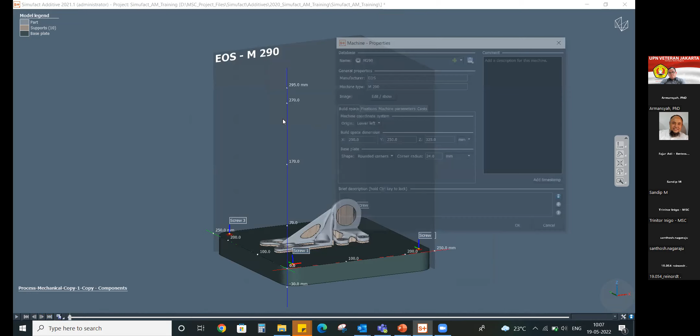For example, I can quickly show the setup. So I go here and I can pick any machine. If you have anything in mind, you can let me know and I can select that particular machine. So let's go with this. Let me change this to 400. The moment I change it, the respective boundary condition will be loaded automatically.

Then I can import the part, which might be of any CAD native file format, since we support any CAD native file format.

Then when it comes to support, either we can import the support or create our own, whether it's Materialise Magics or Simufact support. You can create it within the Simufact GUI, no need for any additional license. If you're already using Materialise, we have an option to create basic line, block, and point supports. Or if you want CAD-based additive support, you can use that, which is contour-based. So there are many options, either import it or create support inside the software.

Then material selection. We already have commercial grades available in the market, but if you have your own material, you can add it into the library. I strongly suggest, if you have any new grade, please send it to us, because we are also doing a lot of testing. If it's similar to one we have, we've already developed the material data, and we can...

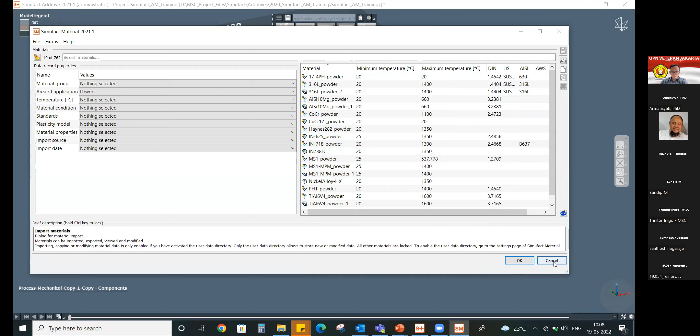Santosh, they are just getting into this 3D printing. They don't have any machine set up yet, for prototyping vision. So it's a very initial stage. Okay.

When it comes to material, we have commercial grade available, so you need not worry. Then we can simulate build, heat treatment, release, and cutting operation.

If you're new and not sure which is the best support structure for a given design, we have something called support optimization. If you activate this, the software will run a couple of simulations and tell you which is the best support structure for the given component. This is unique, so we can save a lot of time investigating the best support structure.

On distortion compensation, as we already seen, you can just define your target value compensation, so the software will tell you what will be the final distortion or distortion control we can achieve with a different set of design. Then we do the voxel and surface meshing.

Once the simulation is completed, we can go for post-processing and view the results. This is how we can view the result layer by layer, like how the part is getting printed inside the machine.

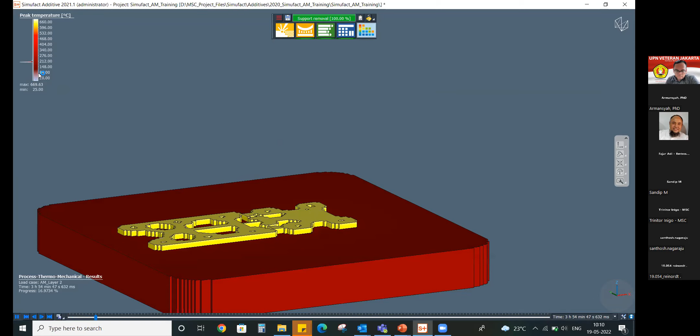We can view different parameters, like what is the peak temperature during printing, then look at stresses developed, how the stresses are getting developed at fixed corners inside the part. Then you can look at if there is any manufacturing risk like recoater collision, part failure, delamination. You can also look at relative density in the component, heat flux related information, displacement in each direction, strain, and stress. So you can look at all variables which influence part quality.

I'll go to the last step. This is the actual printed one. For example, you have already printed a component and want to compare this with the original CAD, so we can do superimposing or shape comparison.

If you have a scanned component and want to compare it with the scanned component plus simulation, you can import that as a reference geometry and do the shape comparison using a best fit method, so you clearly understand what your initial design was and how much it is deviating, and at which locations. So if you want to give further machining allowances on the 3D printed component, you can design those machining allowances over here.

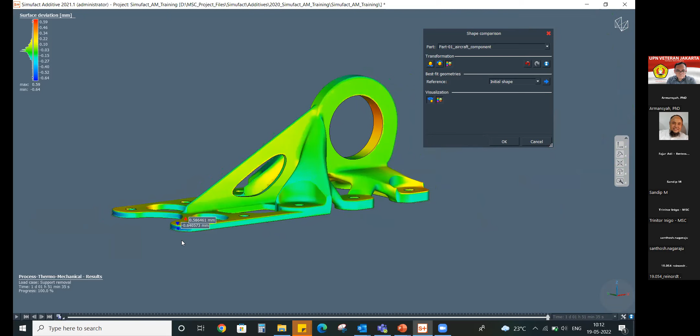These results can be exported if you want to do durability analysis or fatigue life analysis. You can export these results in a file format readable in Nastran, CAE, Fatigue, or any computation tools. You can take this geometry along with the residual stress, so you'll have a more realistic life estimation of a component. So this is a quick overview.